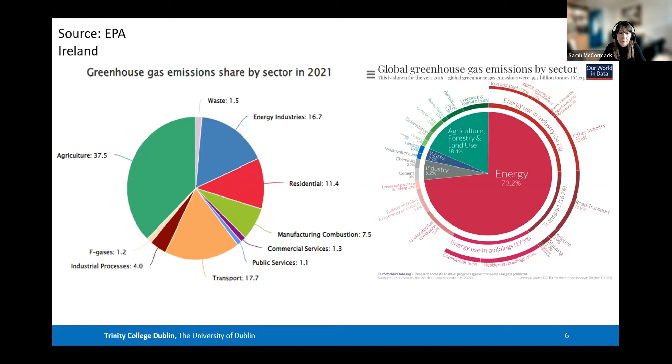So how we transform our travel, our transportation, and my colleague, Professor Brian Caulfield, would have spoken to you about that, and even towards making farms more sustainable in terms of energy generation, energy reduction, in greening enterprise and entrepreneurship. And another colleague last week, Angus, would have talked to you about how he's doing that through energy efficiency measures. And then also through land use, energy is impacting there as well.

We may question that in terms of, how does that happen? When we think about wind farms, that's a way that we're changing our land use. But also now we have these targets for solar energy too. And when we think about wind, the target is 9 gigawatts. We have about 4.5 installed. So from our climate action plan, we target to have 9, so we're doubling that capacity. And maybe we won't be impacting on land use there. Maybe it's offshore that we're thinking of, so maybe ocean use or sea use or whatever the equivalent is.

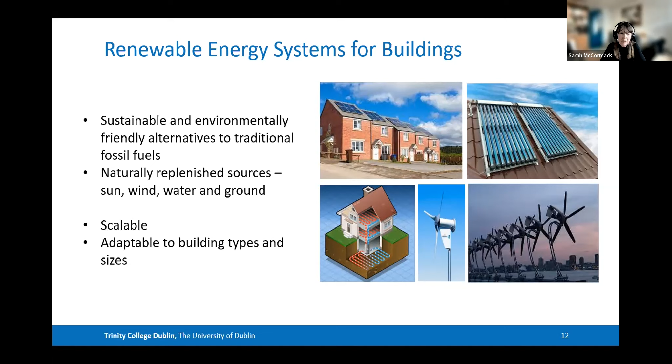So now we have our local generator. We are in some way hedging our bets in terms of our electricity and our heating supply in the future. We're able to have some independence from the grid. And also, of course, we're reducing our climate and our carbon emissions. And this is where it's helping us to reduce that energy in buildings, a target that we have. But before we think about energy in our buildings, it's important that we think about the design first.

So looking at building orientation, how can we maximize the free solar gains that we have here? So whether it's facing the building south or southeast, looking at how we can ensure that we have a very energy efficient building envelope so that we're not losing any of that energy in terms of our walls or roof or windows or doors, ensuring that they're all playing their part in terms of creating that very airtight building envelope. Green roofs and walls can also help in terms of improving insulation and natural shading.

And then, of course, daylighting. So it's trying to ensure that we're maximizing the amount of that daylight into our buildings. That's minimizing then the need for that artificial lighting, and again, another requirement on our electricity generation. So we can use things like skylights into our buildings, light shelves and solar tubes to try to enhance that daylight deep within our buildings, and try to ensure that we first create this energy efficient building, and then we can look at our renewable energies. So then we need much smaller systems in our building, of course, and that's helping in the overall outcomes and towards our climate action.

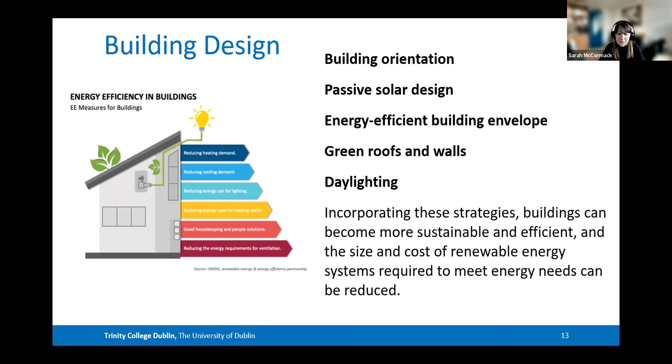So that brings me to our IDEAS project then. So in terms of the IDEAS project, it's looking at integrating renewable energy systems, these different types, into buildings, and trying to see how we can work together towards creating an optimized system for buildings, whether that's in Ireland, whether that's in Italy or France or Spain or wherever. So you're taking advantage of the natural energy flows in the region first and trying to optimize that. So this is the project.

It's 14 partners, and they're from all around Europe. It includes university partners as well as industry partners, and it has research institutes and it has community groups as well. So it's a diverse range of people involved, and we have 2 demo sites as well. So one site is over in Westport in Mayo, and the other site is in Ferrara in Italy. So again, we're trying to ensure that we're having the demonstration of all of these technologies in 2 buildings in 2 different locations so that we're able to have different optimization and control techniques for both of these systems.

So the IDEAS system looks to develop photovoltaic technologies, integrating them with solar thermal, along with thermal energy storage techniques. Then along with that, it's looking at geothermal and air source heat pump technology. And this is all coupled with underfloor heating. So in terms of the systems that we're using, it's generating electricity, but also generating space heating within the building. And then, of course, not quite necessary in Mayo, but in terms of cooling, we have cooling options for the demo site in Ferrara, which is obviously necessary there in the summer, but sadly not so necessary in Westport.

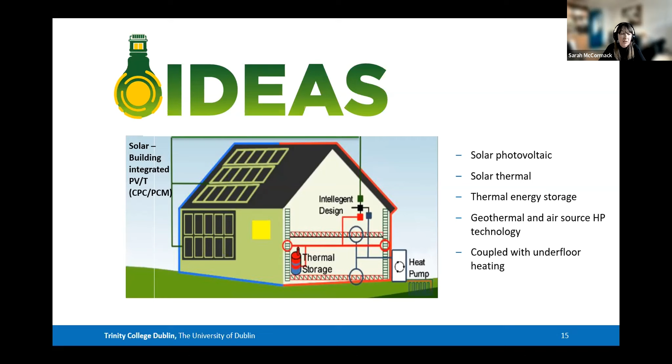So the dependence then in terms of the different types of technology that's used, it really depends on the region, depends on the season, and depends on the time of day. So we have different demands and different requirements depending on where we are. And we also have different sources or different energy supply, I suppose, depending on where we are as well.

So if we have a large amount of solar gain in the summertime in Italy, we would still have a good solar gain in Westport, but obviously it wouldn't be as high as that in Ferrara. But then again, in Ferrara, we need that electricity for cooling, whereas in Westport, we don't. So again, it's optimizing the demand, optimizing what generation supply is needed, depending on the demand at that particular point in the day.

The two demo sites, as I said, so this is the Drummond Brackloon Community Centre in Westport, Mayo. The community group there has very kindly let us in to really take apart their community centre and put it back together. And we're working with Mayo County Council on that, and they're heavily involved in the installation and implementation on that site.

And then the larger demo site is in the University of Ferrara in Italy, and that's around the snack bar. So essentially it's the university campus snack bar in Ferrara University. And what they've allowed us to do there has been amazing. It is quite an old campus as well, maybe not quite as old as Trinity, but it is very old. And they've allowed us to dig up large areas of the land to put in geothermal heat pumps for the snack bar itself.

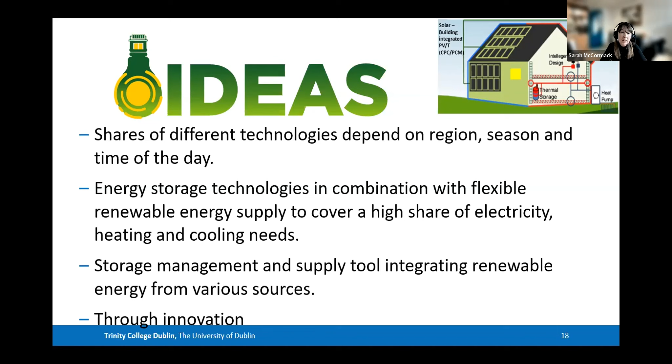So we're looking at how we can enhance the technology from a solar perspective. And the work that we're doing in that is through luminescent materials and how we can enhance the capture of diffuse light. So this is work, as Angus would have mentioned in his talk before, about his journey through research towards development and product.

So here, this is work that was funded through the ERC, the European Research Council, looking at how we can develop solar devices for buildings. So we used some of that work that was developed there, and we brought that into this ideas project to see how we can actually now implement them into buildings.

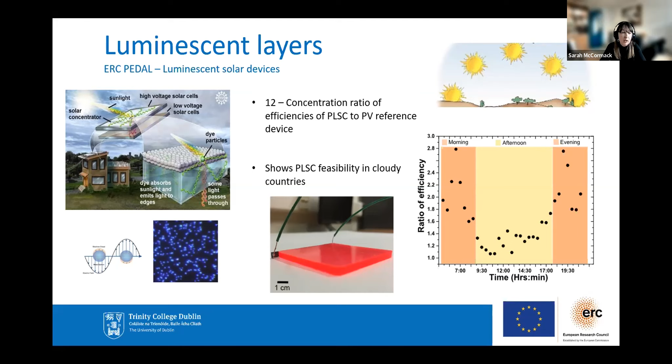So this was looking at the different times of the day and trying to see what type of layers we could make to capture light at particular times of the day to make it more efficient. So it's a purely optical approach. You can see there, I think that's Bill, one of the PhD students, that's his fingers showing you his nice luminescent layer. And these layers were then characterized.

And it's trying to downshift that into regions where the solar cell can use it. So essentially it's moving it from the UV into the visible range. And that's where you're able to collect it, and the solar cells are able to generate more efficiently in terms of their production. So that was one part.

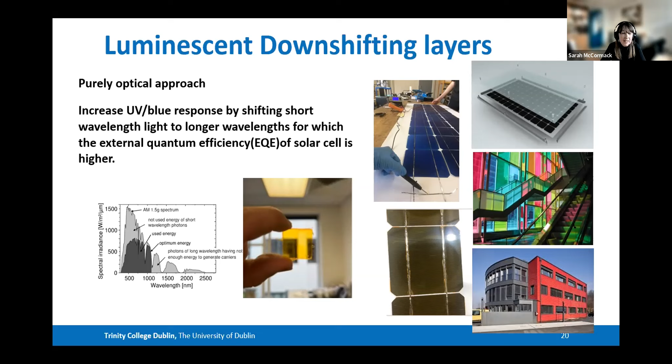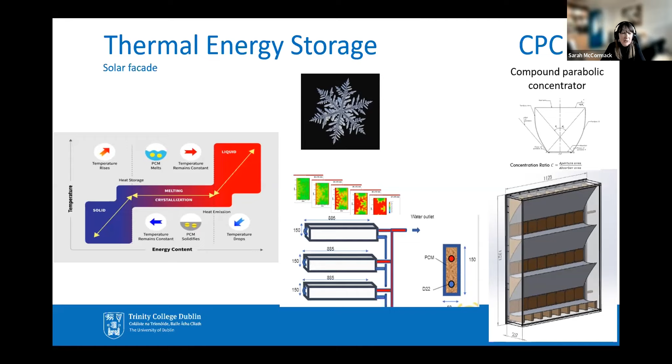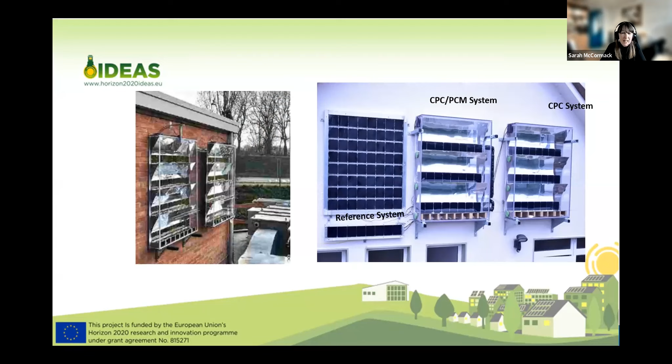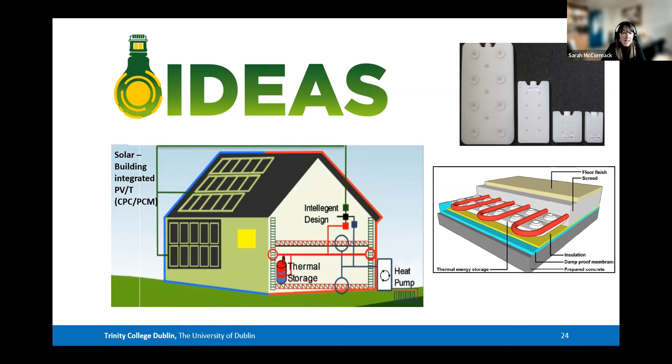Just to give you an idea, first of all, we went in, the floor had to be taken apart, and then these containers of phase change material were placed onto the floor.

You can see the pipe network there in the normal underfloor heating way. We had the screed on top, and as it dried, then we were able to put the wooden floor back onto the surface.

The community centre, one of the important roles that it plays in the community is it has music and dancing every week. So it was of critical importance whenever COVID ended that we were able to leave the floor back in its original condition so that they were able to go back to dancing. So we all went over for a dance when we were able to get the floor back and installed.

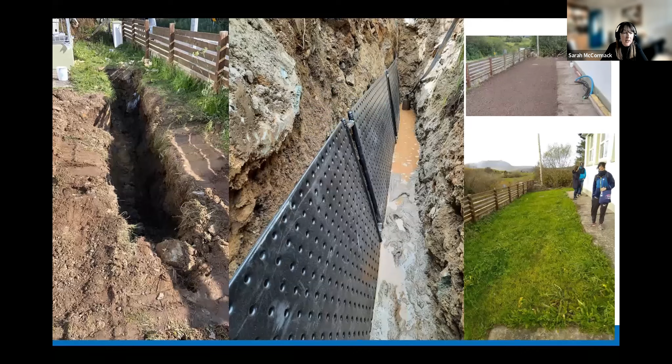So the innovation around this was looking at the vertical heat exchangers in the ground. In terms of the demo site in Westport, we had a very small area surrounding the building itself. So there was no option really for us to use the horizontal loops that we would have in the ground for these types of heat pumps. So we went with the vertical heat exchangers. Here you can see them.

And then very quickly they were covered over, and if you're there now, you would never know they were in the ground, apart from a very large manhole at the back of the centre that allows us to get in when things go wrong, to access and fix them. So this was a small site in Westport. The one in Ferrara was much bigger.

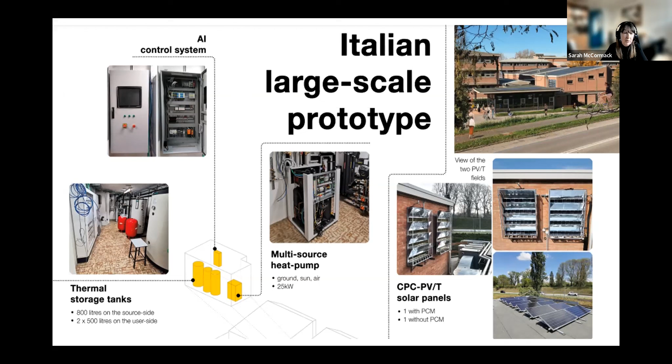But essentially, you can see that this is the campus installation. It has the control systems in place. It has the very large storage tanks there because of the demand and the requirement for energy on that campus building itself. They also installed the vertical heat exchangers in the ground around the snack bar, but many more than what we would have. Over 40 went down into the ground around the snack bar, and that was to facilitate the demand for energy that was needed within the building. So in the summertime, the heat pumps are reversed for cooling, and in the winter, obviously, it's for heating.

And then also what they found with the solar thermal component of the system is that they're using that as a preheat at some points through the day and through the year. The fluid that's circulated in the solar thermal system is then used as a preheat to the fluid for the ground loop before it reaches the heat pump. So this is then increasing the efficiency of the geothermal system by reducing that temperature differential between the ground and the fluid, which can then improve the performance of the heat pump.

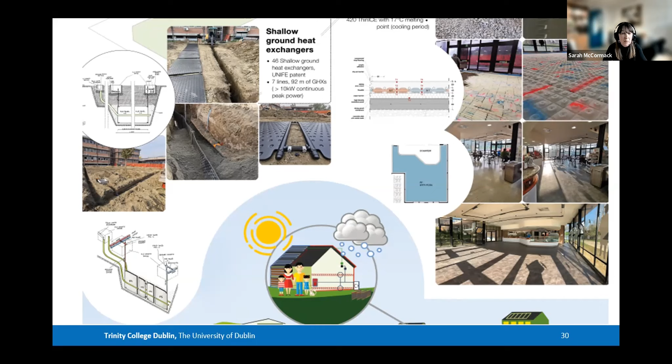Also, by creating some awareness of the project around the campus too, it's trying to tell the students and the people on campus essentially how their energy has been generated to try to reduce their overall demand as well. So trying to create this awareness around energy and energy use in buildings has become a really important part of the project there too.

So then lastly, it's this intelligent control part. So while we have these innovations around the different technologies for the project, the fundamental and the critical component then is actually how do we get them all to talk to each other? And that's where this central automation unit comes in. So what it's doing, it's trying to look at how this sort of energy can be optimally dispatched, because we have this locally generated energy from renewables, but how can we match that to the existing demand?

So first of all, what is the current local generation capacity? So what's the solar resource at the moment? And what's the temperature in the ground? What are the possibilities in terms of energy generation? And then how can we match that with the demand? Is the energy available, but actually the demand is low? How can we store that, and how can it then be moved into the latent, the underfloor heating essentially, with that phase change material?

So it's trying to look at how we can manage our energy use at the moment, day to day, but also how we can look to the future and predict the energy demand in the future, and also the energy generation in the future. So it's really trying to be really flexible in how we're able to move between those different systems, how we're able to feed that solar thermal excess energy into the heat pump if it's needed, how we can then feed it into the underfloor heating if it's not. And this is all done through this automation and control system.

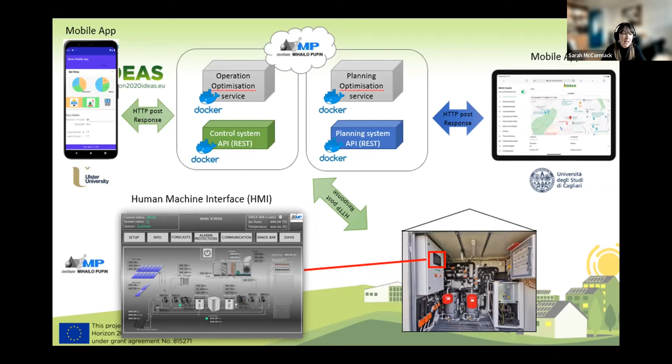So you can see that the grey one there is the sort of view that we would have, and we're trying to develop the app now that will create a much more simplified version so that it doesn't really frighten people away and actually encourages them to use this type of system in terms of optimization. So really that's an overview of the project.